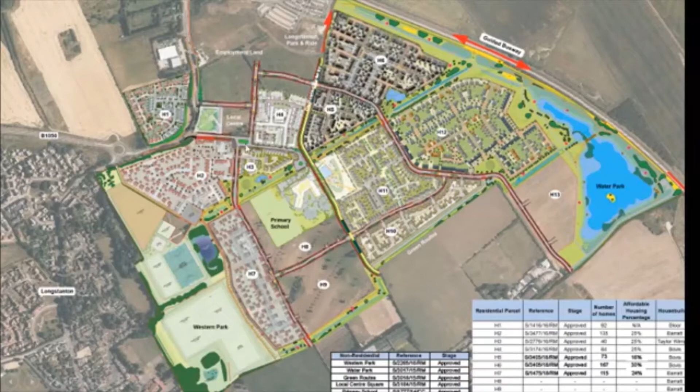Next to parcel 13 is the Faith and Community land. The primary school is already built as a Pathfinder school. Then there's the Western Park, which is largely now seeded. And then there's the sports pavilion and allotment land, and the local square, obviously also completed, and the 5 hectares of employment land is the commercial element.

Phase 2, as I said, was granted planning permission in 2017. It was 3,500 homes in the town centre, but it also included the Southern Access Road West, which, if you drive up the B1050, you'll be able to see the roundabout connecting Northstowe to the Southern Access to the B1050 road. The education campus is being delivered by the County Council separately under a separate planning permission, although it formed part of the outline planning permission as well.

The town centre strategy has now been approved, and work on the buildings in the new town is starting to take place. The Civic Hub will be one of the first buildings, which will include the health centre, library, community uses, and also we expect some other uses as well. We haven't designed them yet - we're starting to work on those issues, and there will be community engagement as part of that strategy.

Phase 2A, which is Urban Splash, I'm not going to go into that too much, but I've got some more plans on that. And Phase 2B, which is the other bit that's next to Rampton Drift - no plans have been submitted as yet. I'm not aware that a development partner has been selected, so we don't really have much detail to share on that.

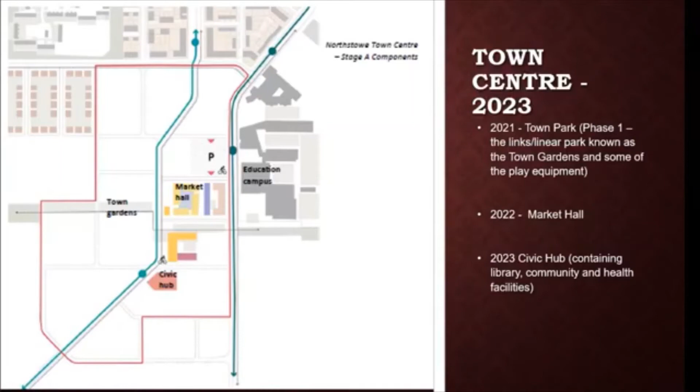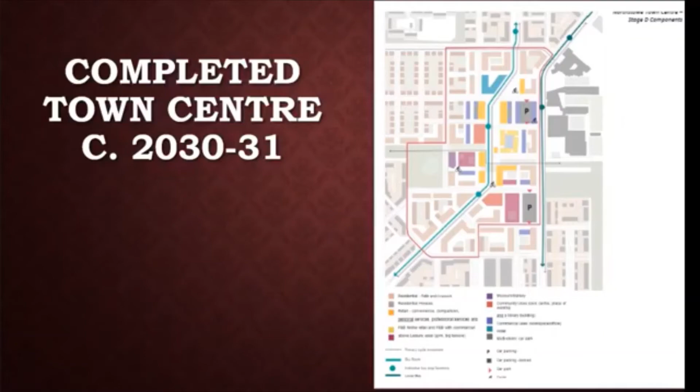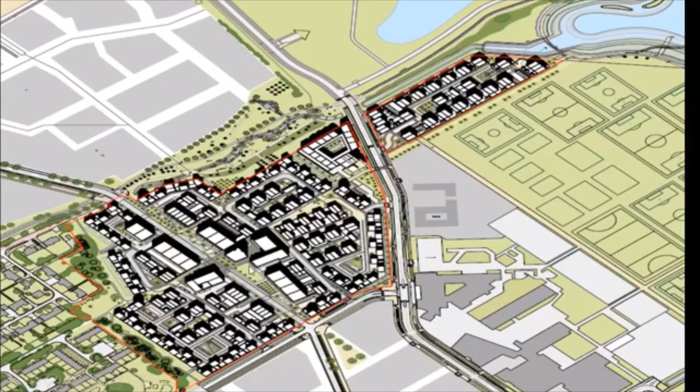So this is an image of the southern end of Rampton Drift. The play area is immediately to the left of this, and there you can see the 2-story buildings and the staggered approach to the design.

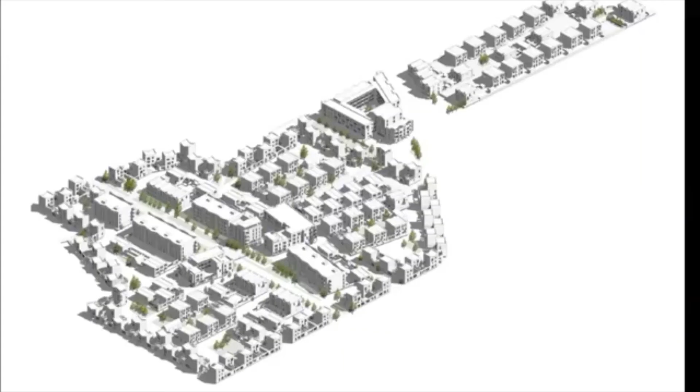Again, some of the other aspects - this is part of what we call the urban park quarter in terms of the designs. And again, this was one of the images used at the planning committee, showing the scale of the buildings: 2-story on the edge, there was some 3-story, but the parameter plan complied with in terms of this aspect. Any breaches or changes in the parameter plan were discussed and outlined in the committee report, and also given a fair and significant airing at the committee itself.

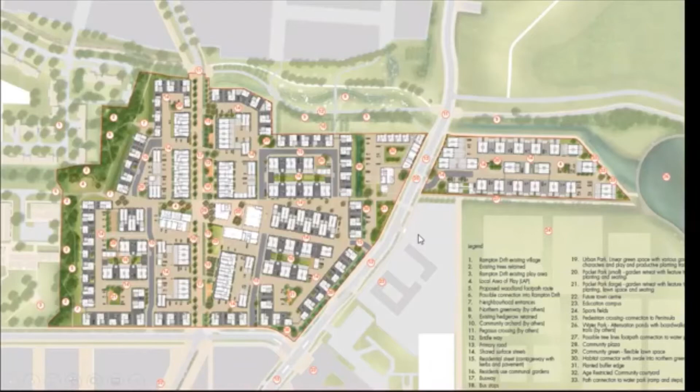Again, this is the site layout. This shows some of the features that Urban Splash will be introducing, in terms of the busway, neighbourhood pocket parks, local areas of play, new woodland, new tree planting, drainage swales that go into the main swale, the water park here on the right, and a number of other aspects running through the scheme.

Rampton Drift, as I said, we gave that very detailed and careful consideration during the design process. There were a number of issues that we discussed and talked about. This was the actual consultation in itself.

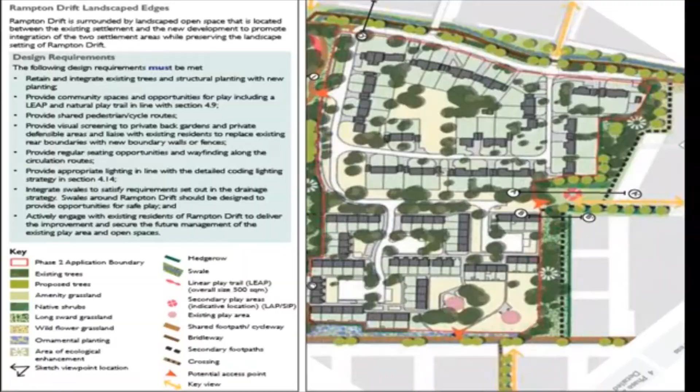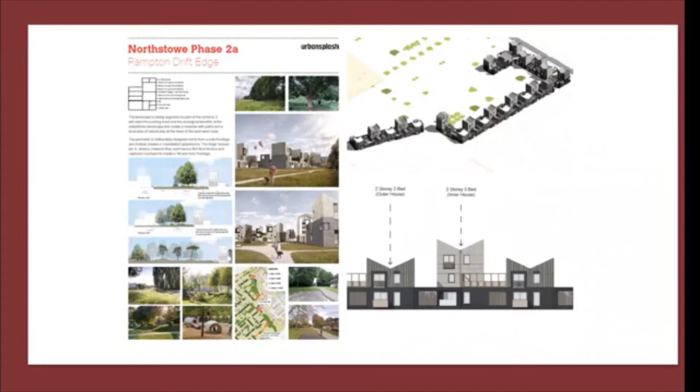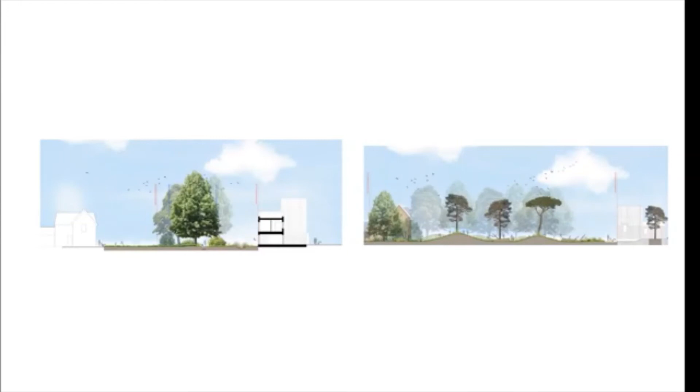And again, this was just a slide that was shown to the planning committee during the consideration of the application. And again, these were the sections shown through Rampton Drift and considered as part of the application, in terms of showing the separation, the retention of the trees, and how that would look here, and that relationship was considered.

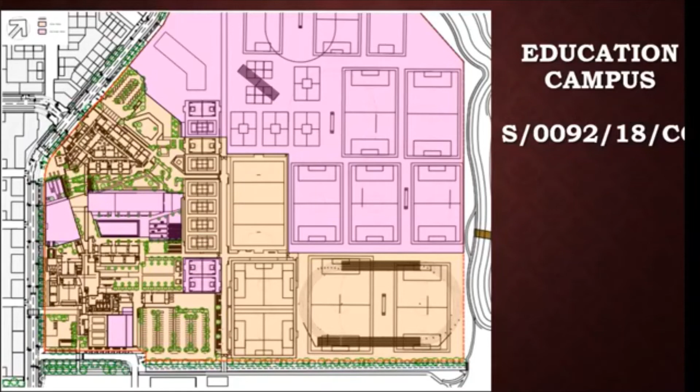The education campus - this is a plan that shows the phasing. Phase 1 is the orangey colour, phase 2 is the pinkier colour. So the education campus has been being delivered on a phase basis, and as I say, that's being done by the county council under their own construction management process.

So phase 3, which now has 2 live applications - we're applying for the principle of development using the evidence base, which hopefully will provide a framework for future development. It's not proposing anything detailed, but one of the things we will be considering is how to bring forward that framework through conditions, Section 106 agreements, and all those matters.

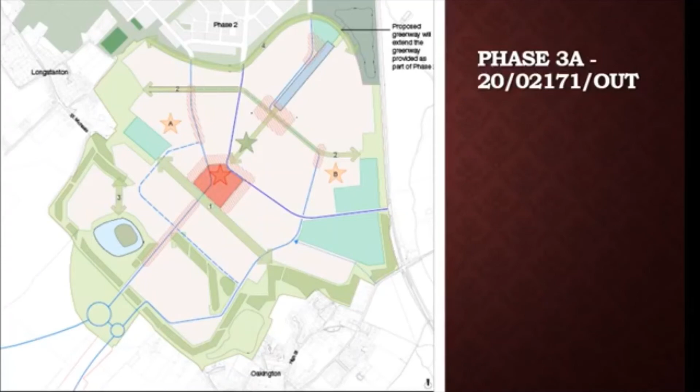Lots of detail, sadly, lots of planning documents to read - something like 700 odd documents, but that's unfortunately the nature of planning, given the legal process that it is.

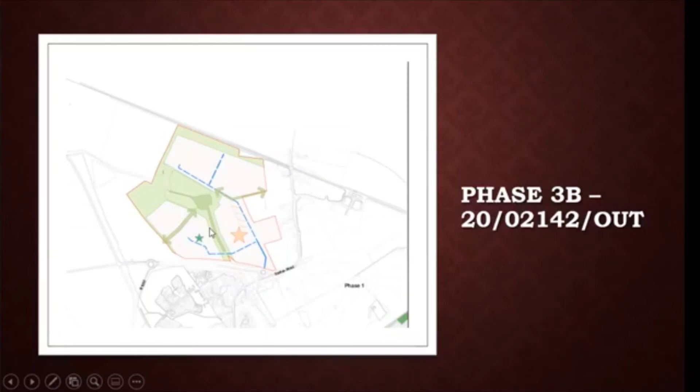This is phase 3B, which is on the other side of the B1050, which comes around, and then phase H, parcel H1 is here, and this is the woodland copse you can see in the middle of the field. As I say, this has been part of the 2018 local plan, now an allocated site.

There are two other parcels, one called Digital Park and one called Endurance Estates. Both of those we know roughly what's being submitted. Digital Park is a live planning application - we think there'll be some amendments soon - and Endurance Estates we're expecting very shortly. Both of those form part of the wider reserve land allocation.

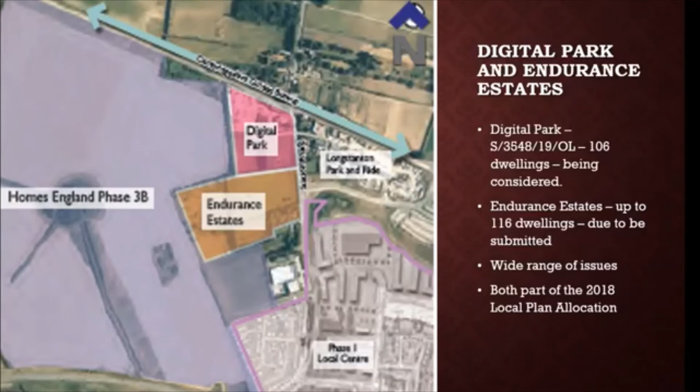So Digital Park, this is the master plan currently. It's been through a current design review, so we're expecting some amendments shortly.

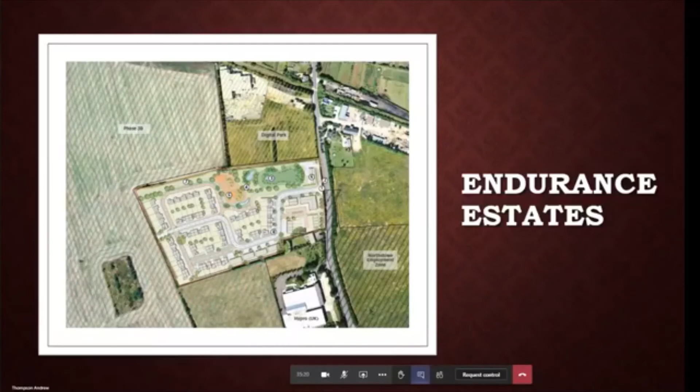And Endurance Estates, this is a master plan that's been previously shown to the community forum, in the Northstowe Community Forum. Again, we're expecting some changes, but those aren't in the public domain at this moment in time.

So we're aware of a wide range of issues. First and foremost, COVID or coronavirus, as it's also known. Developers stopped for a while, certainly on the parcels of phase 1, but obviously they're now coming back. There is social distancing, which does mean there are changes in working practices, and we're all adapting to those. Extensions to hours - the government has set an expectation that extensions to hours are looked at favourably to ensure that the economy keeps going.

We are aware of the issues that have been happening in the past, but obviously enforcement and monitoring is being seen as much more of a resolve-the-problems approach rather than a preventative measure, so to speak. So we're being encouraged to work differently, particularly on enforcement, than we previously were, due to the changes as a result of coronavirus.

So, further questions - these are some of the things that have come out of the questions from emails prior to the meeting.

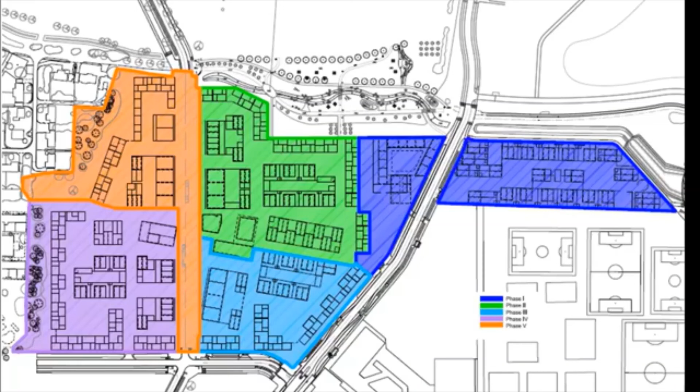So this is how phase 2 will be built. Phase 1, which will be the peninsula, we will be building the older person or age-restricted accommodation, and then it will work its way to phase 2, which is this bit, phase 3, phase 4, and then phase 5. But obviously these also depend on sales, and I'm sure Urban Splash can talk more about that.

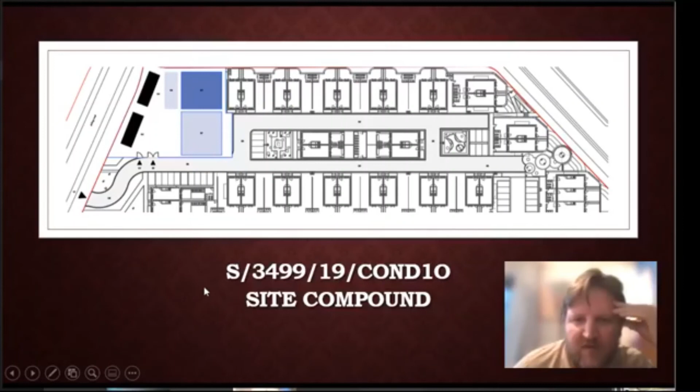Again, the site compound will be on the peninsula for the initial phases, and then it will move across to where the marketing suite is at this moment in time. This is the reference number if you want to view the documents which relate to the site compound details.

The access route for all the vehicles will be through the Southern Access Road West. It is largely complete as an actual piece of infrastructure. It's not connected at the moment for normal traffic, but construction vehicles are using it and can use it. So the delivery vehicles - this is directly from the construction management plan - this is how people will access it, using the existing airfield road and the Southern Access Road, and links being created and already in place.

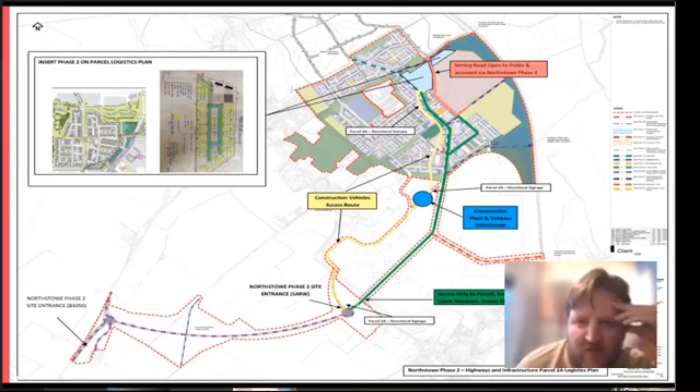Other aspects, and this is hopefully my final slide, working hours. You can see here, mindful of what I said earlier, these were specifically conditioned as part of the approval. So it's 8 till 8 on weekdays, and 8 till 5 on Saturdays, with no working on Sundays, bank holidays, or any other public holiday that may exist at the moment or may come forward.

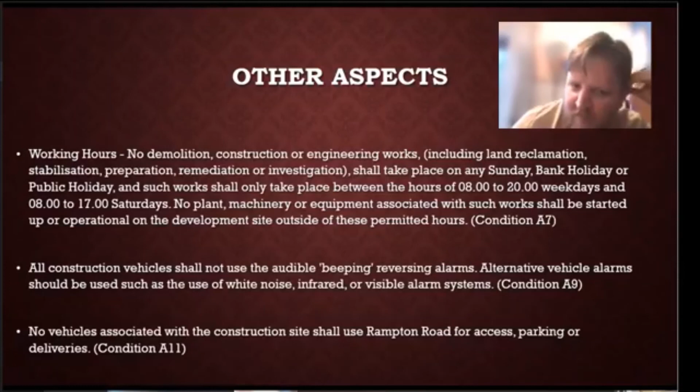Again, we've also conditioned that there should be no audible beeping reverse alarms - we know how annoying that can be, so we've tried to ensure that and alternative systems are used. And finally, I know this has been a bugbear for many people on Rampton Drift - there should be no vehicles associated with the Urban Splash development coming up Rampton Road for access or deliveries or any other reason.

That is the end of my presentation. Apologies if that's a whistle-stop tour. I'm happy to answer any further questions, but Chair, that's over to you.